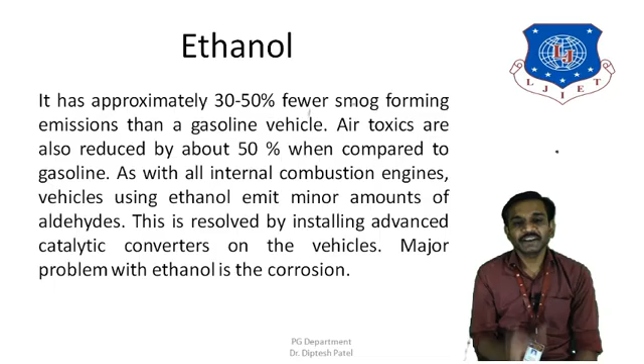Although there is a major issue of using ethanol, it causes corrosion in IC engine components, so that needs to be looked after and taken care of while using ethanol in the IC engine.

Now let's go through the advantages of ethanol. The first is high anti-knock properties, because it has a high octane number, and therefore it can reduce issues of detonation and knocking in IC engines.

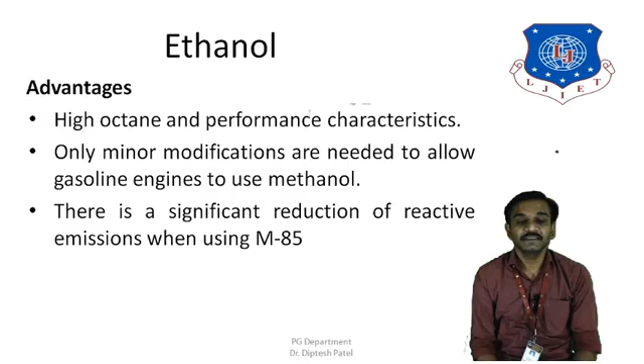One more thing is that no major modification is required to supply ethanol into gasoline engines, for example, as we have seen for methanol. So ethanol doesn't require any special modifications like we require for large modifications in CNG, biogas, or LPG. The emission is also greatly reduced with ethanol.

Now let's go through the disadvantages. The first disadvantage is that it has a lower calorific value as compared to gasoline, as compared to diesel.

The second major disadvantage is corrosion, because ethanol reacts with different components and can be very corrosive if used in an IC engine. So proper techniques should be taken against corrosion.

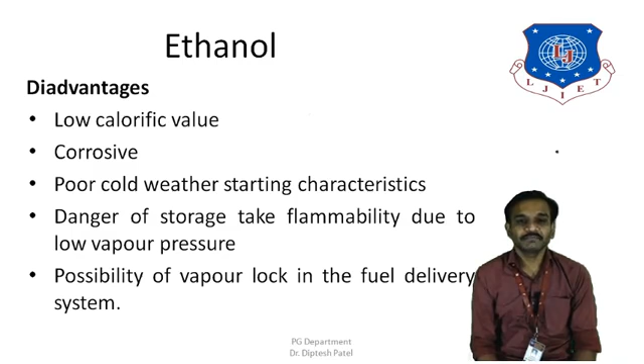Then it has issues with poor cold weather starting problems, and there is a danger of storage tank inflammability because of low vapor pressure, since it can convert into vapor form even at low pressure. There are chances of fire, and a possibility of vapor lock in the fuel delivery system, because it can easily change its phase even with low pressure. So these are the disadvantages.

Now let's jump into the next alternative fuel, which is biodiesel. You might have seen biodiesel petrol pumps in Gujarat, because we have so many biodiesel fuel stations there, and its popularity is increasing day by day.

Basically, biodiesel is primarily made from the oils and fats of plants. It could be used as a replacement for diesel, but blending biodiesel and diesel is quite popular at the moment, at approximately 20% biodiesel and 80% diesel. So whatever losses would occur from replacing diesel can be covered up by using the blend.

Now the process, which we'll see in detail through a flow chart, is known as the transesterification process, in which fatty esters are formed, and then the byproducts of biodiesel are removed, giving us biodiesel and also glycerin while processing the biodiesel.

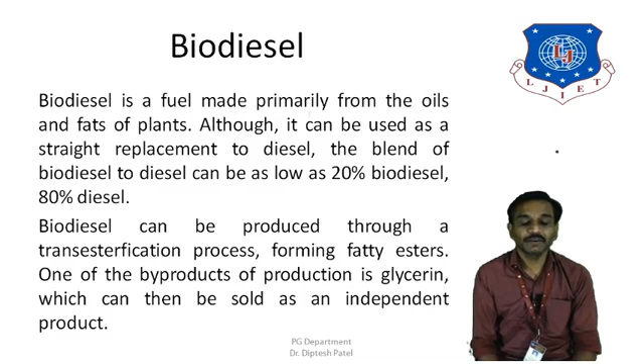Now if you look at the environmental characteristics, glycerin can also be used for pharmaceutical industries as an independent product. Biodiesel has no aromatic content and only certain traces of sulfur. The major emissions that occur in a diesel engine, such as large amounts of CO2, smog, smoke, NOx, HC, and CO, can be greatly reduced by using biodiesel.

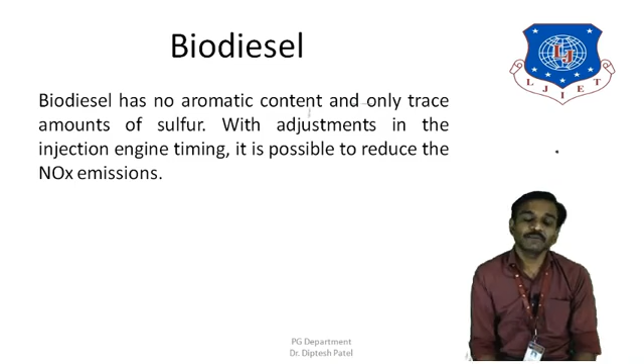The issue of NOx emissions in biodiesel can also be reduced by adjusting the injection timing. So the emissions produced by biodiesel can also be reduced by doing certain modifications to the engine.

Now let's go through the flow chart of biodiesel production. First, the catalyst and methanol are mixed into a vessel, such as potassium or sodium mixed with alcohol.

Then this mixture is allowed to enter a closed reaction chamber, in which vegetable oils, cooking oils, or animal fats are mixed. This vessel is kept closed from the atmosphere so the reaction process happens as quickly as possible, and the losses of alcohol are greatly reduced.

The temperature is kept at or just slightly above the boiling temperature of methanol, around 60 degrees Celsius, and this process requires at least 1 to 8 hours. So basically the reaction takes place in a closed vessel, known as the transesterification process.

After that, it is supplied into the next vessel for the neutralization process, in which a neutralizing acid is added to neutralize the mixture of catalyst and methanol or alcohol.

Once neutralization is done, the byproducts of biodiesel are removed from the crude biodiesel and taken into separate flow lines. Phase separation takes place, such as separation of glycerin and biodiesel based on gravity, because glycerin is a lot heavier compared to biodiesel.

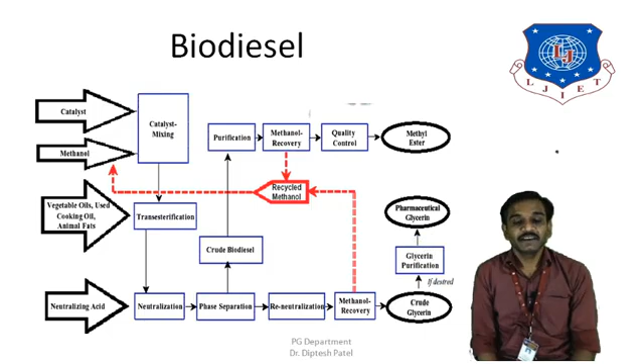Once the recovery of methanol takes place, all that remains is crude glycerin, which is then purified again and can be used in pharmaceutical industries as glycerin. So this is how the production of biodiesel and glycerin takes place, as shown in this schematic diagram or flow chart.

Now let's go through the advantages of biodiesel. First, it produces low emissions compared to conventional fuel. It is biodegradable and non-toxic compared to gasoline or diesel, especially diesel, and its cost is also lower than diesel.

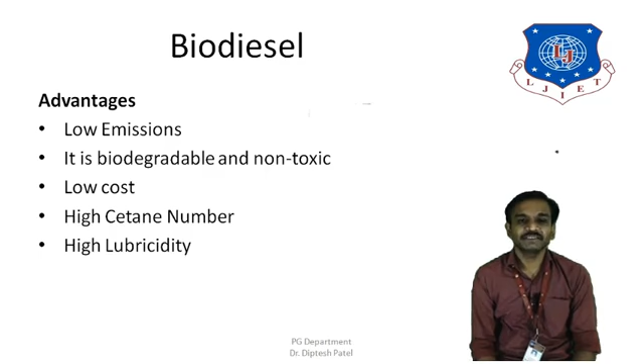Furthermore, it has good anti-knocking properties, a high cetane number, and high lubricity. These are the advantages of biodiesel when used as an alternative fuel instead of diesel. Biodiesel is quite popular nowadays, and people are using it much more widely compared to the past.

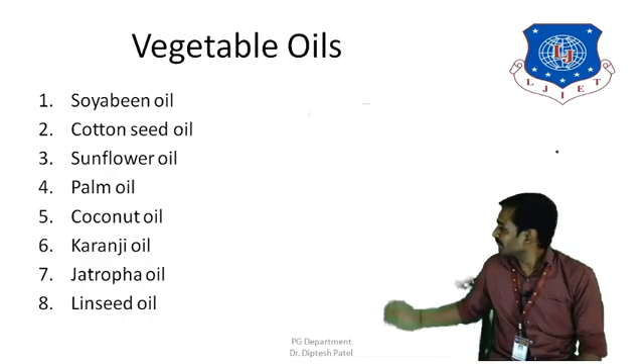Next we have the category of vegetable oils. India has many natural resources where we can get vegetable oils that can be used as alternative fuels. Some of these are soybean oil, cottonseed oil, sunflower oil, palm oil, coconut oil, karanji oil, jatropha oil, and linseed oil.

So these are different natural products from which oil can be extracted and used as alternative fuels in IC engines. There are many more vegetable oils besides the ones I've mentioned that can be used as alternatives.

Vegetable oils have certain advantages and disadvantages. The first advantage is that they have a good calorific value and cetane number. Compared with conventional fuels, they have a comparatively good calorific value and cetane number, and therefore can be used directly in IC engines.

However, certain disadvantages mean these fuels must be reformed before use in IC engines. The first disadvantage is higher viscosity—it is highly viscous compared to conventional fuels, requiring a special type of fuel injection system.

This requires major modifications to the engine. Otherwise, if we use vegetable oil in the same engine, the fuel line would become choked up. So we require a special type of engine, especially the fuel supply system, for vegetable oils.

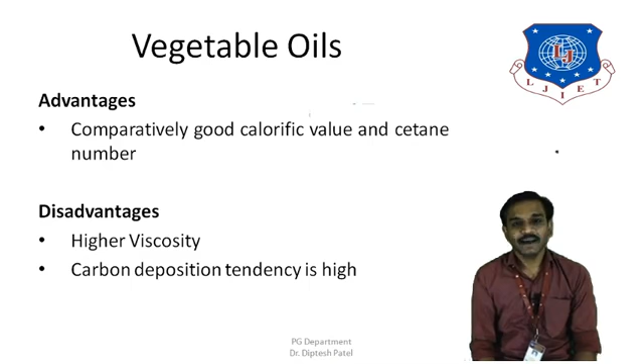So these are the different types of alternative fuels that can replace conventional fuels, so we can reduce overall carbon emissions into the atmosphere, reduce the global warming issue, eliminate the scarcity of fossil fuel that we are facing, and keep these resources for our new generation as well.